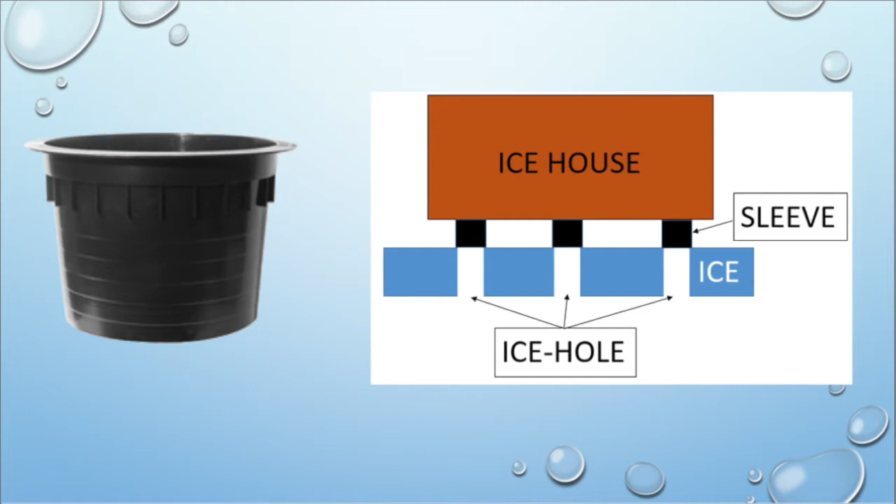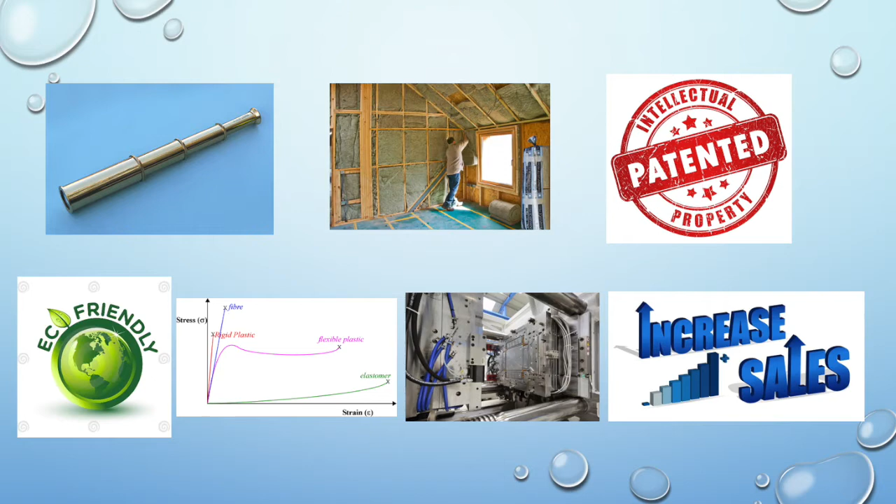The objective of this project is to design an ice fishing sleeve to accomplish this purpose, along with the development of its manufacturing plant. The ice sleeve design has to meet 7 overall constraints, which include dimensionally adjustable, insulated, not impinging on current patents, environmentally friendly, durable, manufacturable, and marketable.

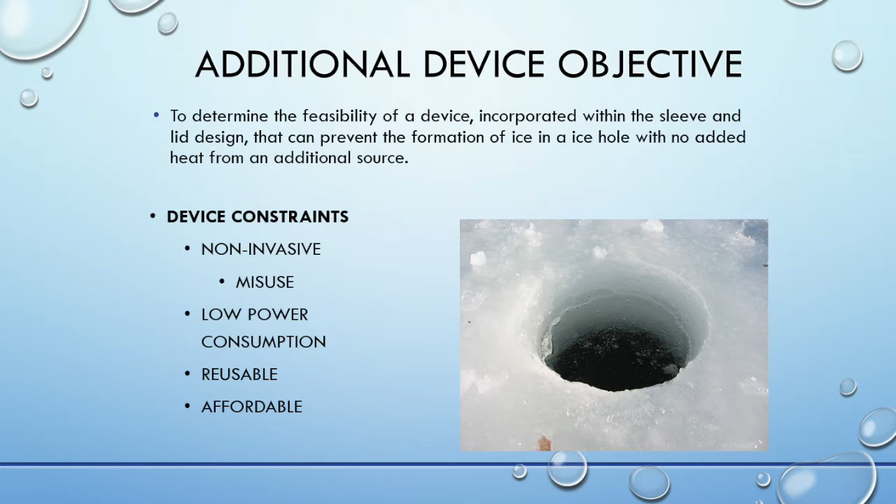In addition, a separate device objective was investigated to see the feasibility of an added device to prevent ice formation without added heat. 4 major device constraints were developed, which included non-invasive, low power consumption, reusable, and affordable.

Catch Cover and Fish Hole Buddy are the 2 competitors on the market today. Their sleeves are very similar in design and feature a fixed height sleeve with thin walls.

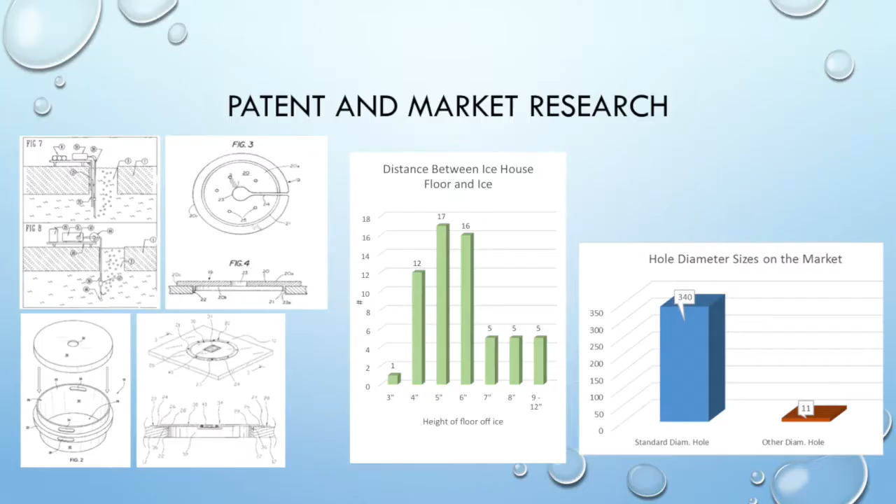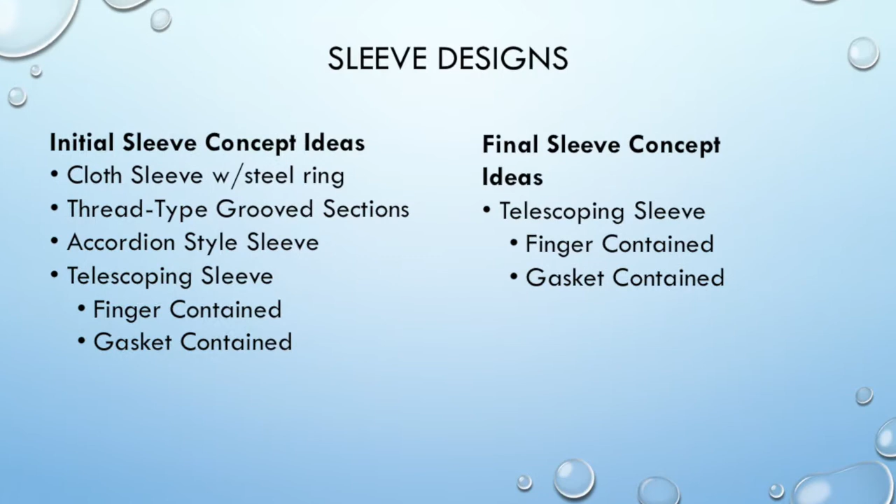With our project objective, we moved on to patent and market research to more clearly define our design constraints. To get a better understanding of the market we were going after, the team attended the Winter Sports Expo in St. Paul. With all of the information we obtained from research and attending the Ice Expo, we came up with 5 initial sleeve concept ideas, which we narrowed down to 2 final concepts.

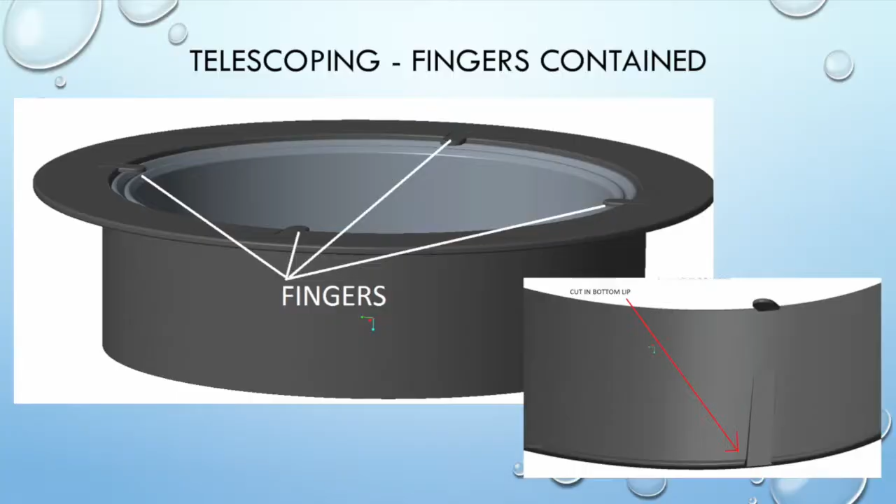Both of these designs include 3 sections that allow the sleeve to telescope down to the surface of the ice. The first of which includes 4 protrusions, or fingers, that stop the sleeves from falling out through the top. The second design accomplishes this through the use of a gasket that will be overmolded into the outside sleeve.

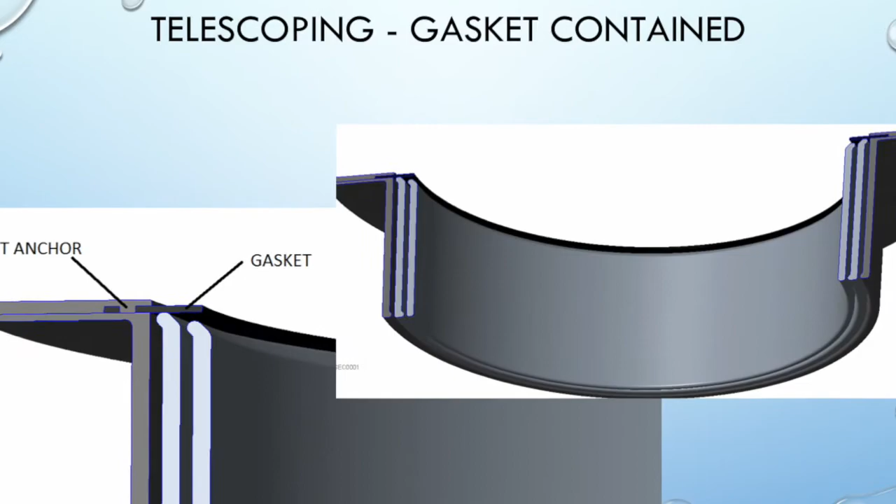Our lid design incorporated a fan that served as the device to stop ice formation without added heat. We were able to create full-size 3D printed prototypes of our sleeve designs through the use of the NDSU Mechanical Engineering Department facilities.

The first step in the experimental setup was to auger a hole into a tote that had been previously frozen with water. The hole was then filled with water to simulate an ice fishing hole. The tote was then placed on a pallet underneath a box. The box was insulated to act as a consistent control volume.

The whole setup was then placed in a walk-in freezer, and a radiant heater, thermostat controller, and thermocouples were used to control and monitor the temperature in the control volume.

2 main tests were conducted: a stagnant heat test at 60 degrees, and a test at 50 degrees incorporating a fan in the lid. Both sleeves failed to prevent ice formation during the stagnant heat test at 60 degrees.

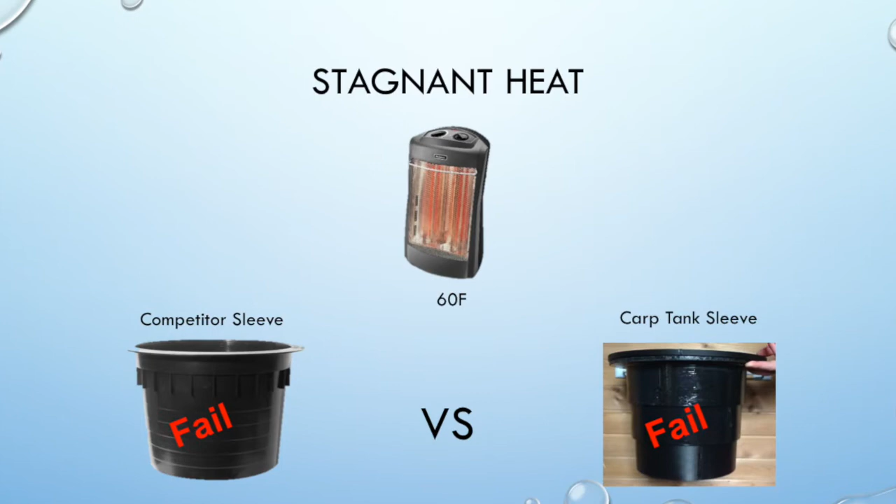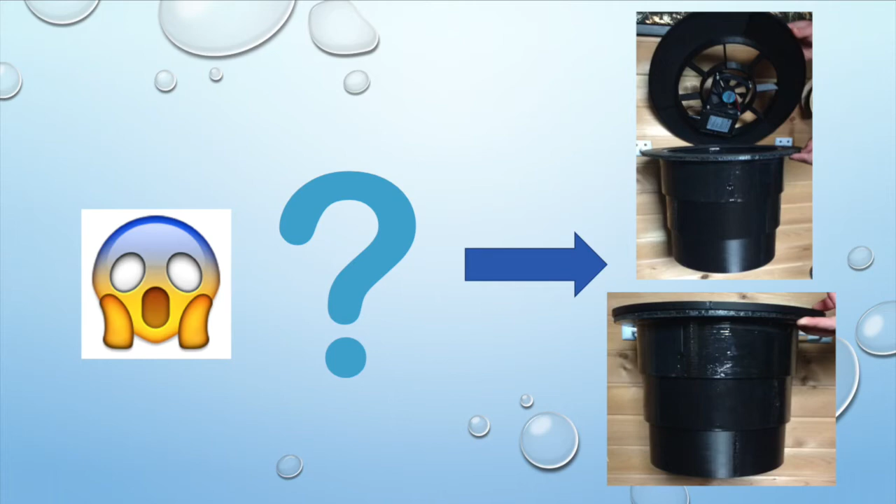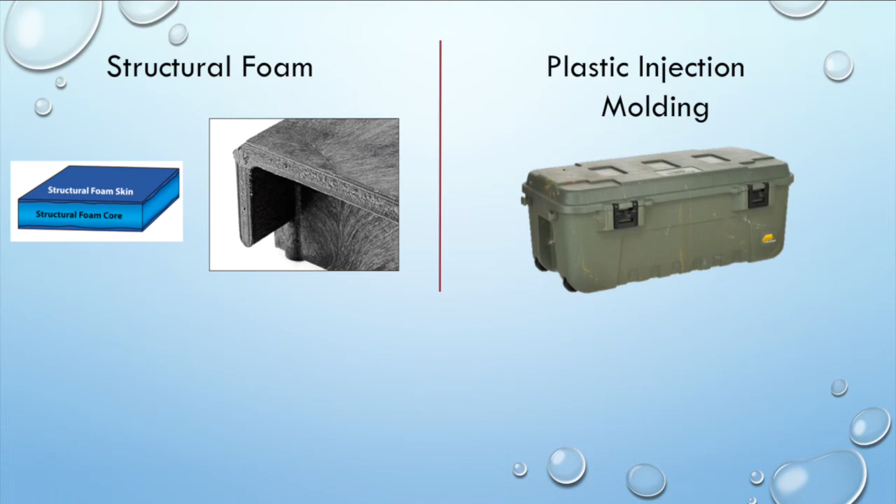The team was then tasked to develop the manufacturing plan to produce the sleeve. To do this, we investigated materials, manufacturing processes, and prices from multiple manufacturers. The 2 final processes determined to be used were structural foam and injection molded plastic, both of which use the same injection molding process that is capable of making all sleeve and lid designs.

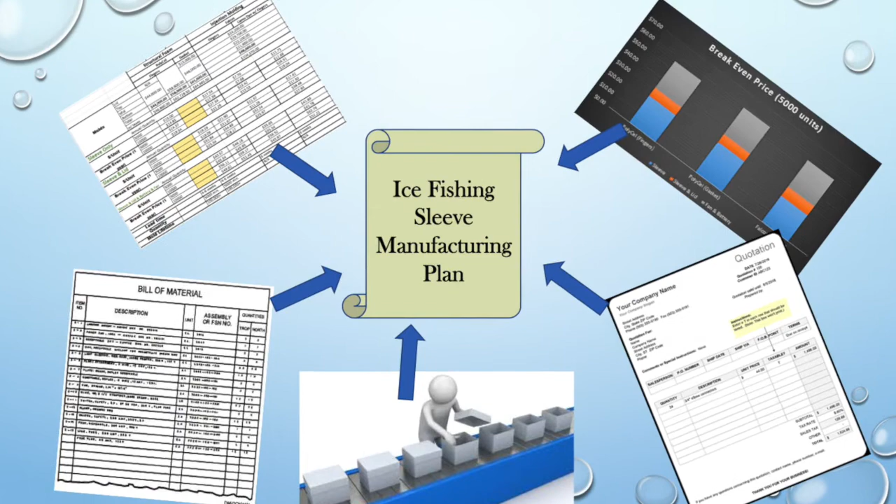Additionally, the production of the lid fan assembly consisted of researching and quoting materials and assembly costs. All the quotations, bills of materials, and manufacturing costs were economically analyzed and presented to the sponsors to proceed with at their will.

Prior to full production, additional testing will be required in a real environment. This will allow for any slight design modifications and business decisions to be made.